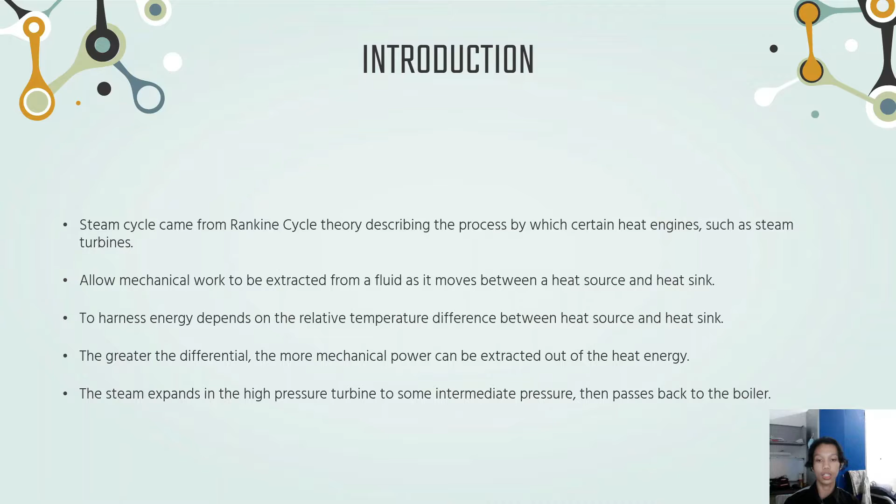History. The Rankine cycle is named after William John Macquorn Rankine, July 5, 1820 to December 24, 1872, a Scottish engineer and physicist. He was a founding contributor to the science of thermodynamics. Rankine developed a complete theory of the steam engine and indeed of all heat engines.

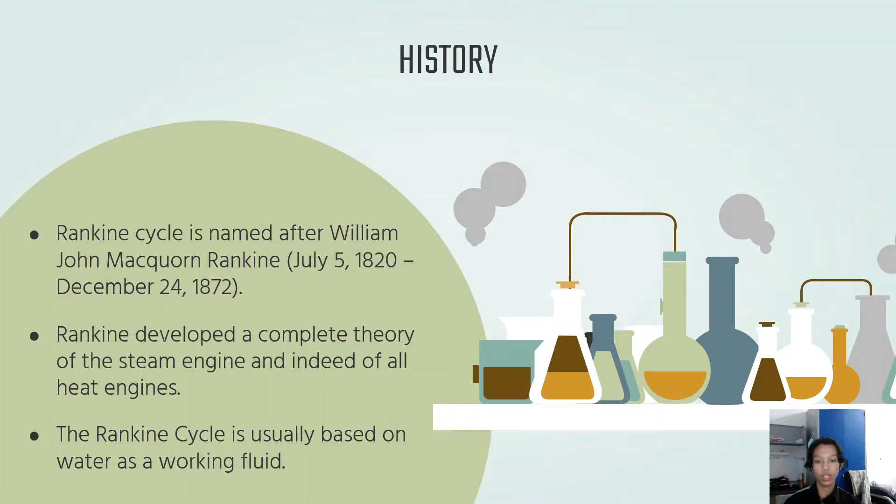His manuals of engineering science and practice were used for many decades after their publication in the 1850s and 1860s. The Rankine cycle is usually based on water as a working fluid. Applications of the cycle with different working fluids started to appear soon, such as the naphtha boats.

The applications of heat cycle and reheat cycle. Firstly, the Rankine cycle closely describes the process by which steam engines commonly found in thermal power generation plants harness the thermal energy of a fuel or other heat source to generate electricity.

Mixed gas steam cycles have been proposed to increase the efficiency of gas turbines. Besides that, these cycles allow exhaust heat to be recovered for reuse within the gas turbine plant and are an attractive alternative to combined cycles for small and middle-range industrial power plants.

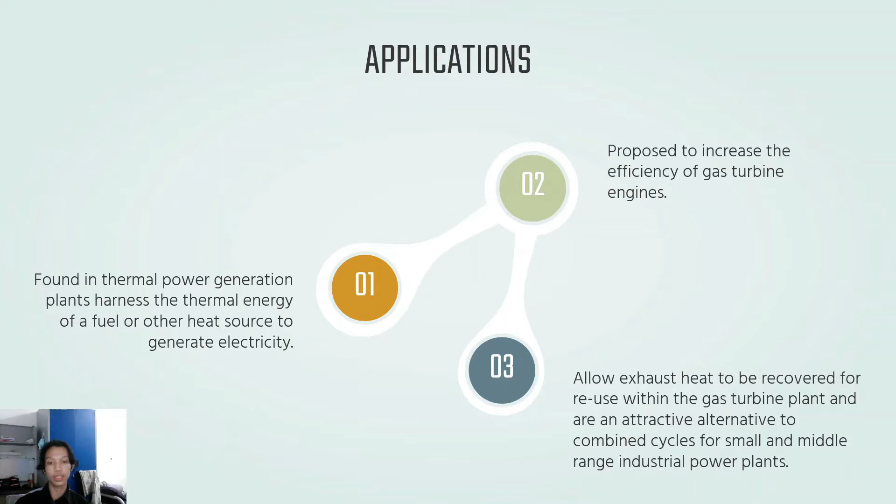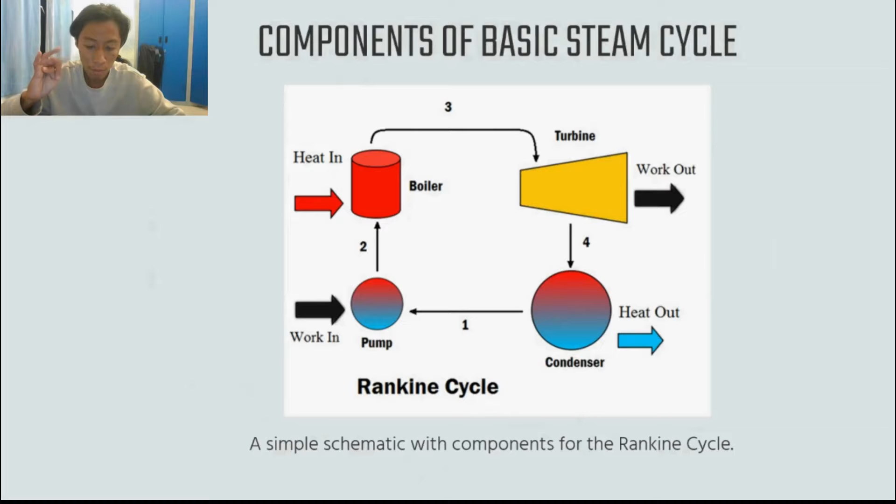I'm going to present about components of basic and improved cycle for steam cycle. There are four components of the basic steam cycle: pump, boiler, turbine, and condenser. The pump is compression of the fluid to high pressure. Next is the boiler. The compressed fluid is heated to the final temperature, which is at boiling point. Therefore, phase change occurs from liquid to vapor.

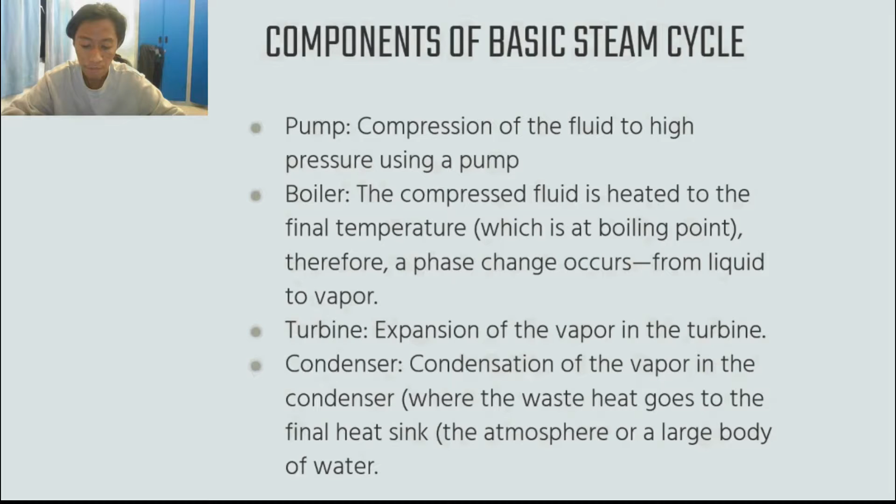Other than that, the turbine is expansion of the vapor in the turbine. Last, the condenser is condensation of the vapor where the waste heat goes to the final heat sink, the atmosphere or a large body of water. To improve the steam cycle, there are three methods: decreasing the condenser pressure, superheating the steam to a high temperature, and increasing the boiler pressure.

Steam leaves the turbine and enters the condenser as a saturated mixture in line with the corresponding pressure of steam in the condenser. Lowering the condenser pressure always helps in delivering more net work in the turbine, as more expansion of steam in the turbine is possible. With the help of the TS diagram, the effect of lowering the condenser pressure on performance of the cycle can be seen and understood.

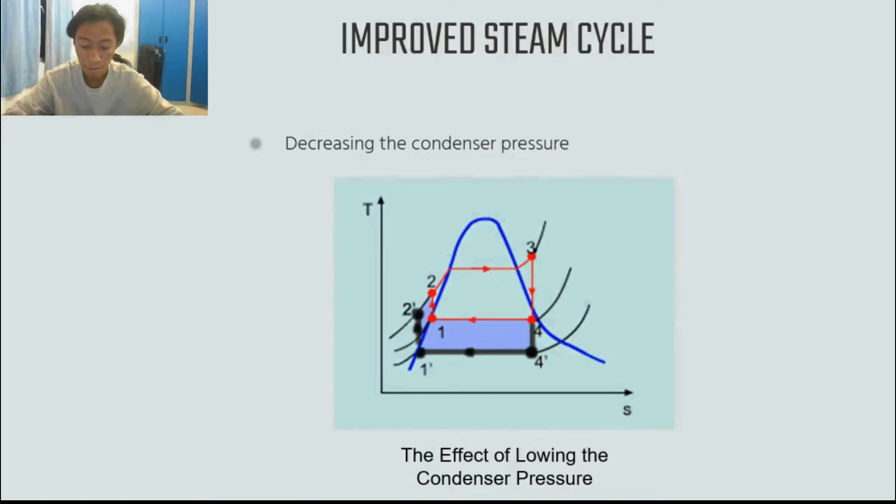Superheating of steam is the phenomenon in which heat is transferred to the steam to superheat the steam to higher temperature by maintaining the constant pressure in the boiler. The shaded area in the above TS diagram clearly shows the increase in net work 3-3'-4'-4 on account of increase in superheat temperature of steam.

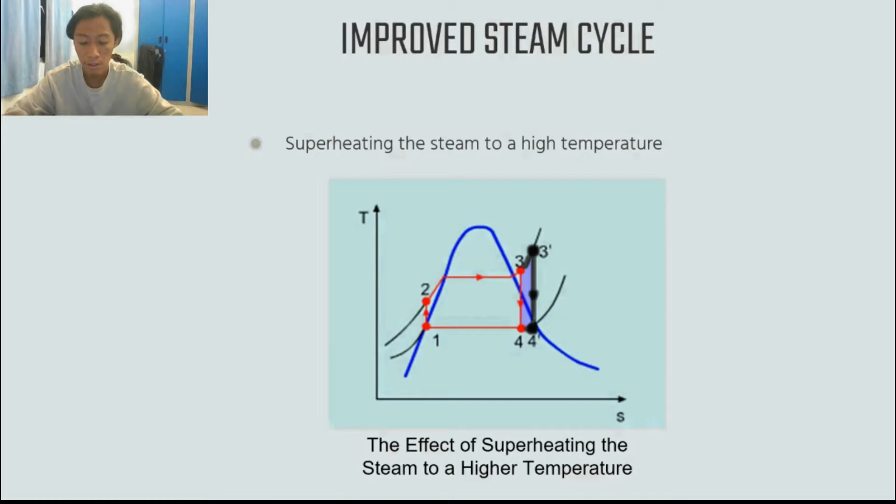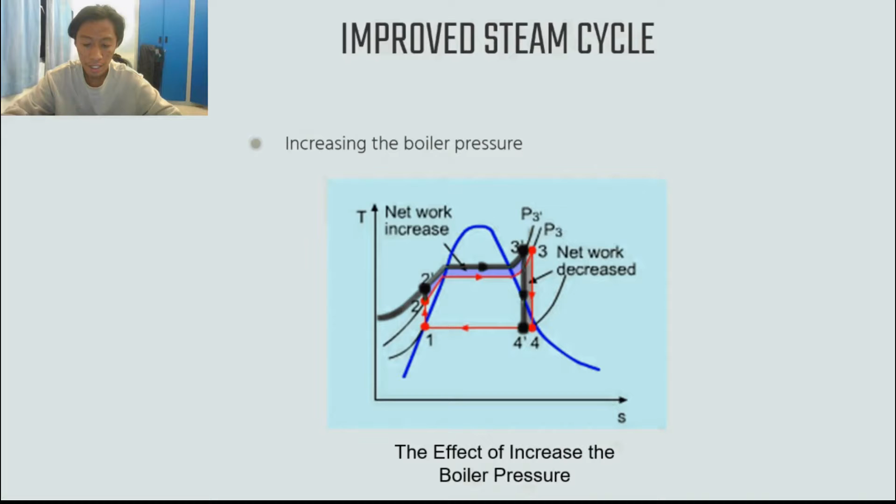Increasing the boiler operating pressure is in a way related with the temperature at which boiling is taking place in the boiler, thus the thermal efficiency of the cycle increases. With the help of the TS diagram, the effect of increase in boiler pressure on the performance of the cycle can be clearly seen and understood. That's all for the components of basic and improved cycle for steam cycle.

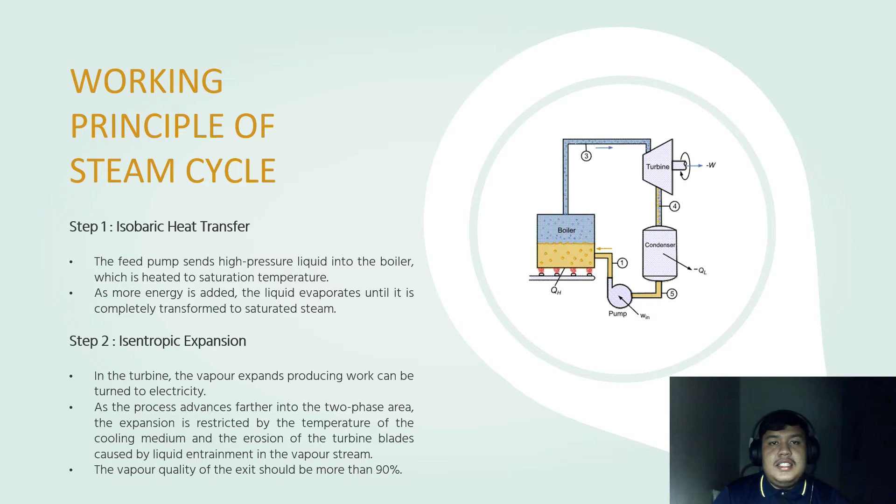The next step is isentropic expansion. In the turbine, the vapor expands, producing work that can be turned into electricity. As the process advances further into the two-phase area, the expansion is restricted by the temperature of the cooling medium and the erosion of the turbine blades caused by liquid entrainment in the vapor stream. The vapor quality at the exit should be more than 90%.

Then there is isobaric heat rejection. The vapor-liquid mixture that exits the turbine is condensed at a low pressure, commonly in a surface condenser that uses cooling water. The pressure of the vapor is much below atmospheric pressure in a well-designed and maintained condenser, reaching the saturation pressure of the operating fluid at the cooling water temperature.

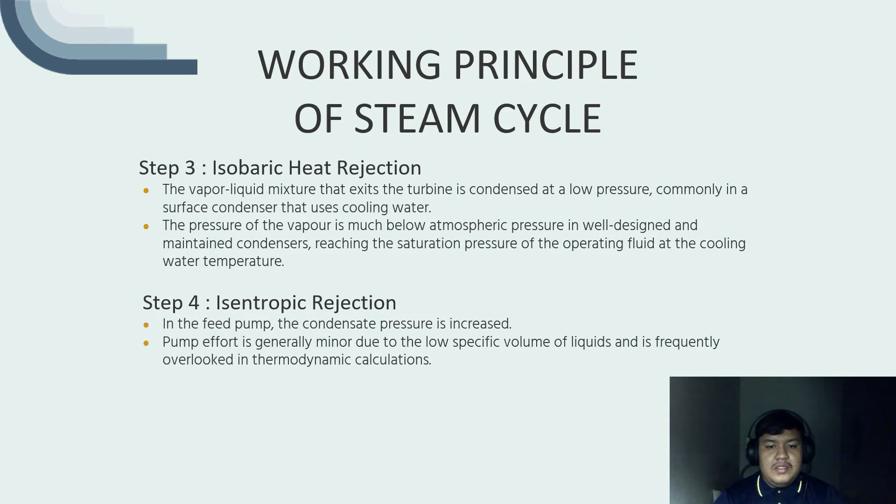The last step is isentropic compression. In the feed pump, the condensate pressure is increased. Pump effort is generally minimal due to the low specific volume of liquid, and it is frequently overlooked in the thermodynamic calculation.

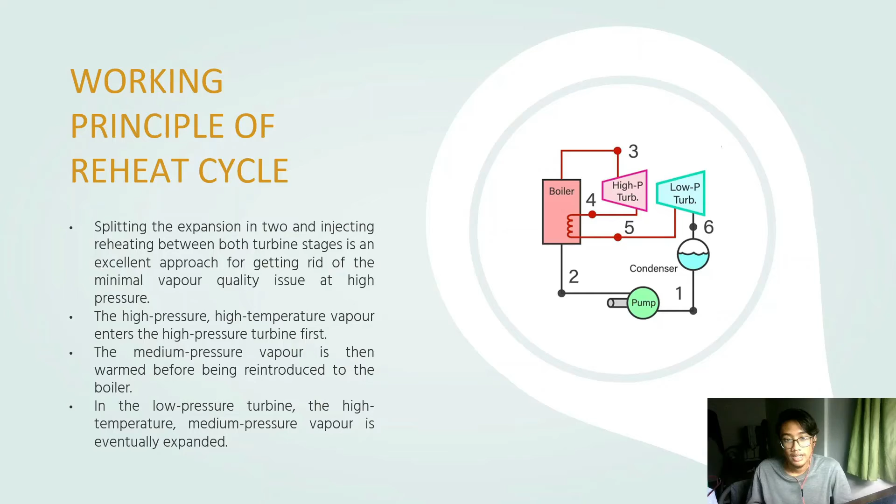For the disadvantages of the basic steam cycle, steam turbines are inefficient under part load compared to reciprocating engines. They require more time to start than gas turbines and almost certainly than reciprocating engines. Third, at the end of the combustion process, the steam power plant emits smoke and gases that might contaminate the surrounding environment. And lastly, the basic steam cycle has a relatively expensive overnight cost.

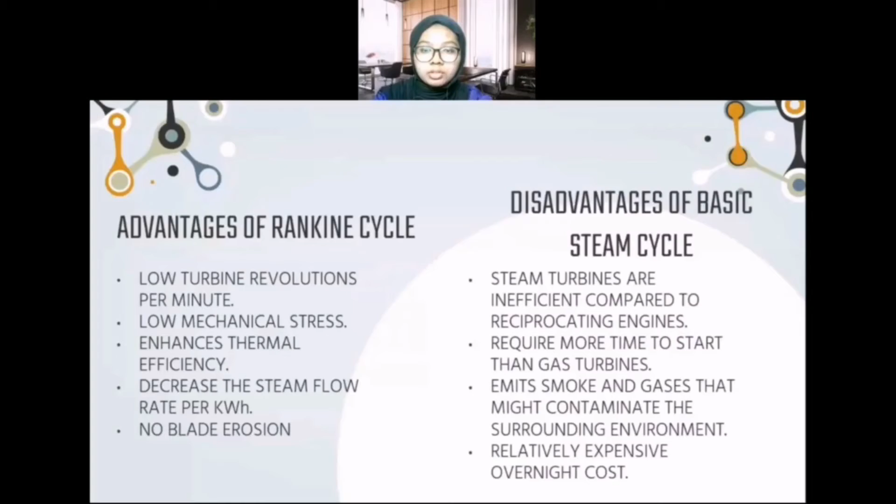So I will present suggestions to further improve the cycle. First of all, we can improve the cycle by reheating the Rankine cycle. This is to take advantage of increased cycle efficiency at higher boiler pressure without affecting the moisture content of the steam in the final stage of the turbine. This can be achieved by expanding the steam in stages by reheating between the steam turbines.

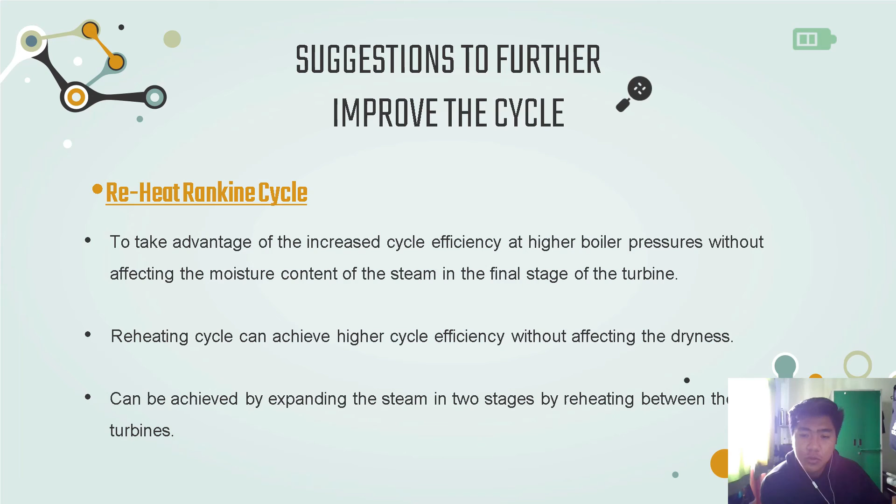Next, we can increase the boiler pressure with subcritical parameters by increasing the boiler operating pressure, which relates to the temperature at which boiling takes place in the boiler. This can reduce the heat rejection to cooling water in the condenser.

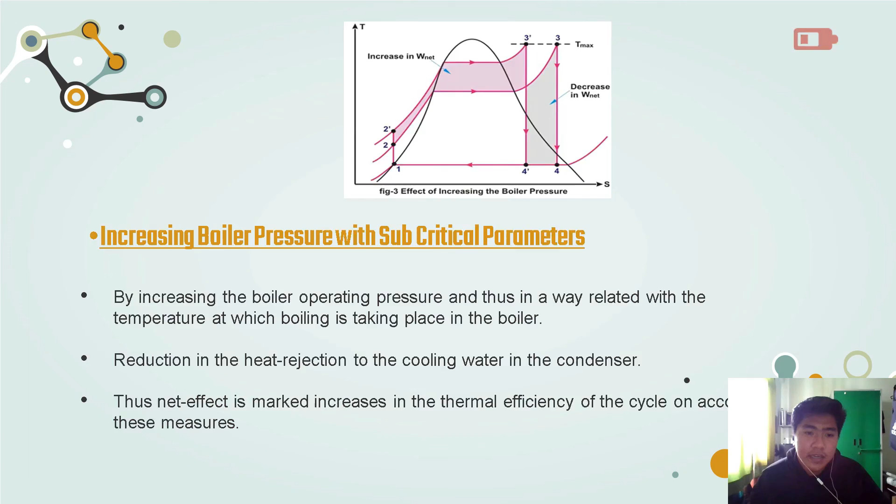And lastly, we can modify the Rankine cycle. For example, the expansion of steam in the reheat cycle occurs in two stages. By doing this, adopting a single reheat cycle in a thermal power plant can enhance cycle efficiency by another 4 to 5%. So that's all for me.